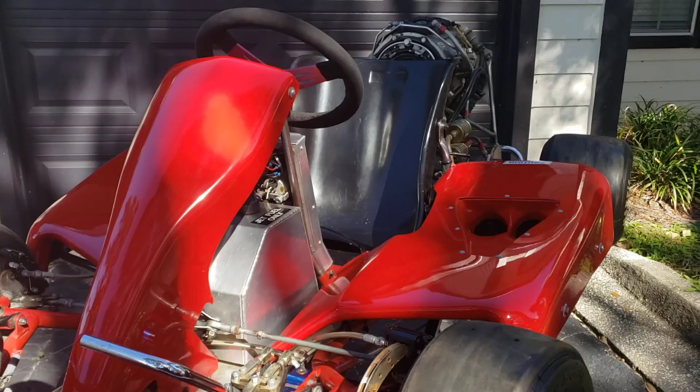Alright, so now we're going to talk about the oil system. The oil system is actually very simple. Right about here where my finger is, we can get a good angle on that.

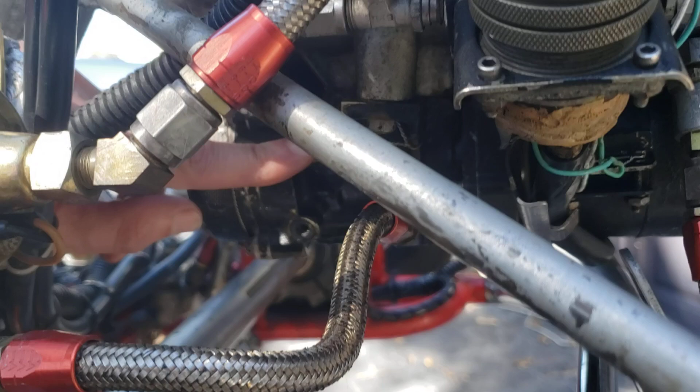This whole little section in here is actually an oil reservoir. This little plug here you can unthread, and there should be a little rod on there. It'll indicate how much oil is inside the reservoir. But the reservoir is very small on these.

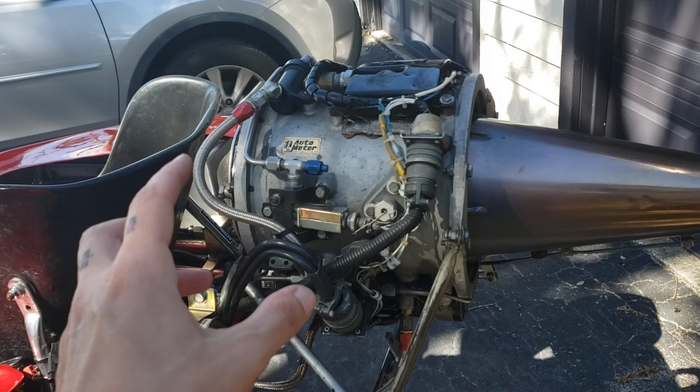These engines were originally designed to run maybe 5 minutes tops. They're just starter motors for a much larger main engine on an A7 Corsair fighter plane. They fire them up, these engines spool up to full throttle, and it gets the main engine up to idle. Once the main engine reaches idle, you've got a cutoff switch that just shuts this engine down. But you're talking maybe not even 5 minutes tops, and the entire start process for this is about 3 seconds.

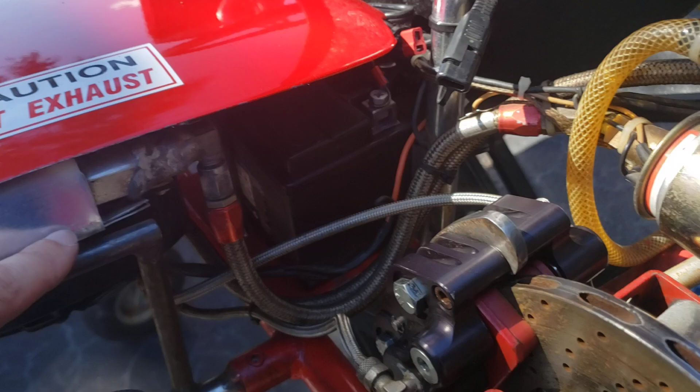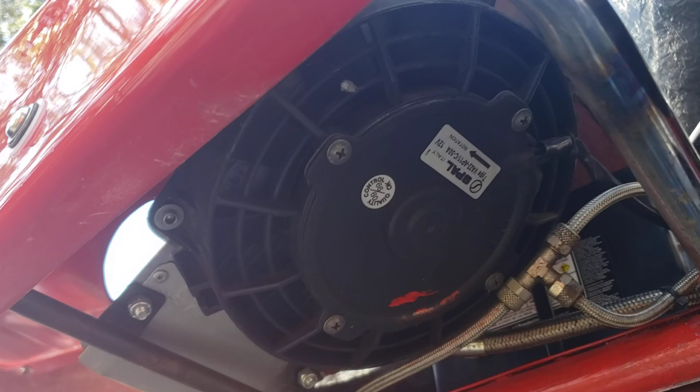So what we've done is tapped off from an oil drain plug. Oil will drain back into the reservoir, come back through this little boost pump. This oil boost pump helps feed oil into an oil cooler, which we have tucked up under this fairing. It's hard to see up under here. We've got a little 12-volt cooling fan to help pull air through, and air comes in through these vents, goes in through that oil cooler down in there.

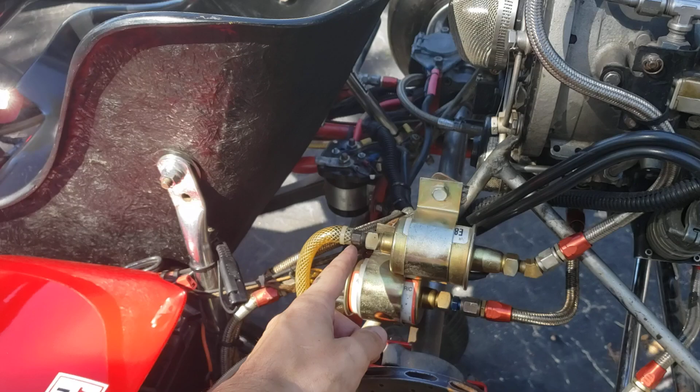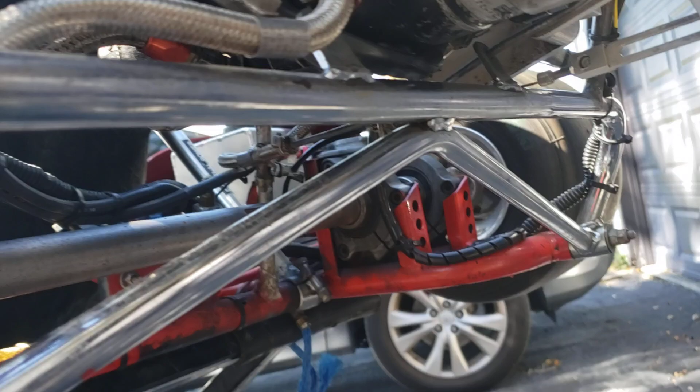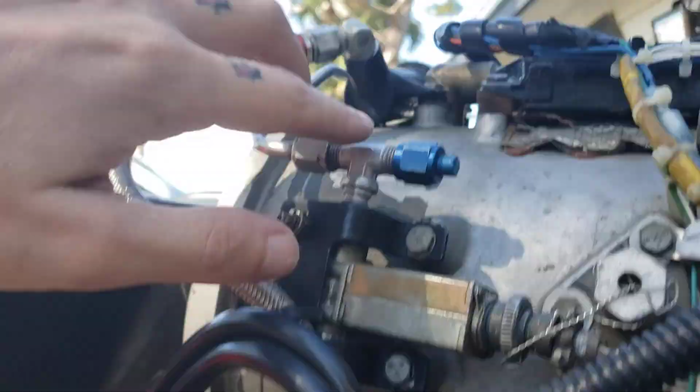Because we have this little boost pump, it will force oil back into, should be this hose here, back into the reservoir on the other side. Now you do have an oil pump in here, I believe it's right in here if I'm not mistaken. I think it's what they call a gerotor, and it just forces oil up into two bearings, one on the compressor side and one on the turbine side, and forces oil into those bearings, then it just drains back down into the reservoir.

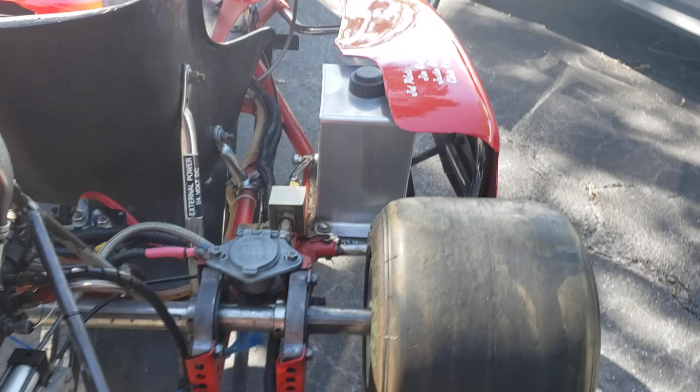And that really is it for the oil system. There's really nothing to it, because the original oil system on these engines was so small. By adding the oil cooler and the extra lines, it gives us a little more oil quantity to play with. However, from my experience, that oil does get extremely hot, so I might put another little oil tank, maybe tuck it down in there. I've got a couple of small tanks we could use. That way it'll give us a little more run time and keep the temperatures down.

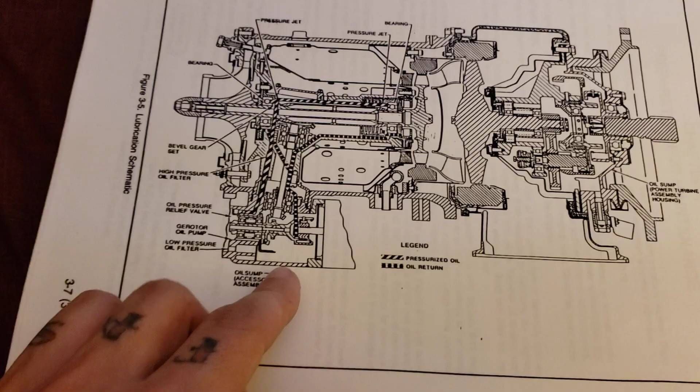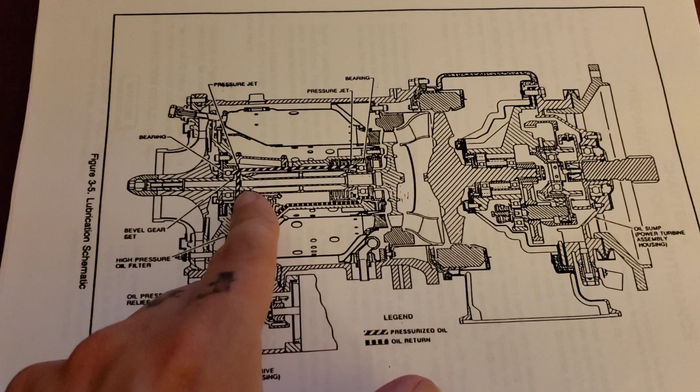Just as a continuation of my first video about the oil system, I've got the actual oil diagram here. So this area here is going to be your oil sump, and there's a low pressure oil filter right in here. As the oil gets drawn into a gerotor pump, it turns into high pressure oil and goes through a high pressure oil filter all the way up into, I don't know if it tees off or just goes, the first bearing here in the front behind the compressor wheel, and then makes its way towards the back.

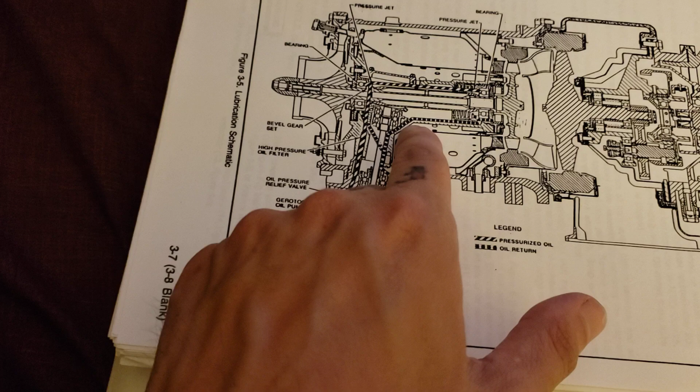I know there's another oil tube in here, making its way to the aft bearing right next to the turbine blisk. Once it gets through this bearing, it makes its way all the way back down, and the same with this. This bearing also has a low pressure oil return, and I'm assuming it probably helps lubricate this drive shaft for the accessory gearbox. But it finds its way back down into the sump here.

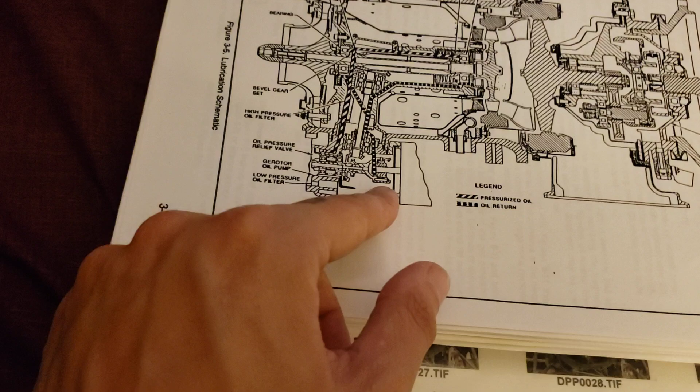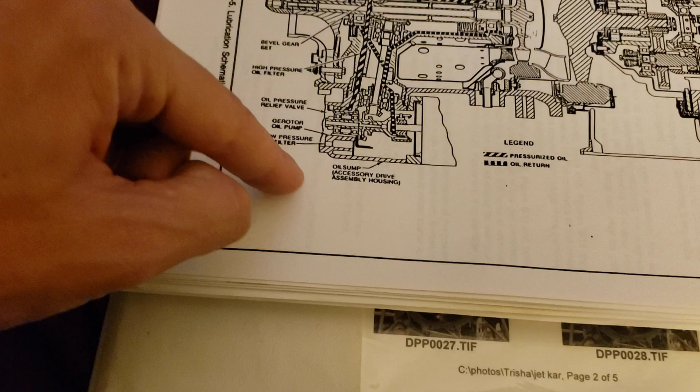Now on the go-kart, there is, I showed you guys, a plug for checking the oil level, and there's also supposed to be a drain plug at the bottom here. It's actually supposed to be a magnetic drain plug. Instead, they've tapped into that plug and sent it to the oil boost pump that pushes it through the oil cooler and then back to another plug on the opposite side of the oil reservoir, oil sump here. That's basically it.